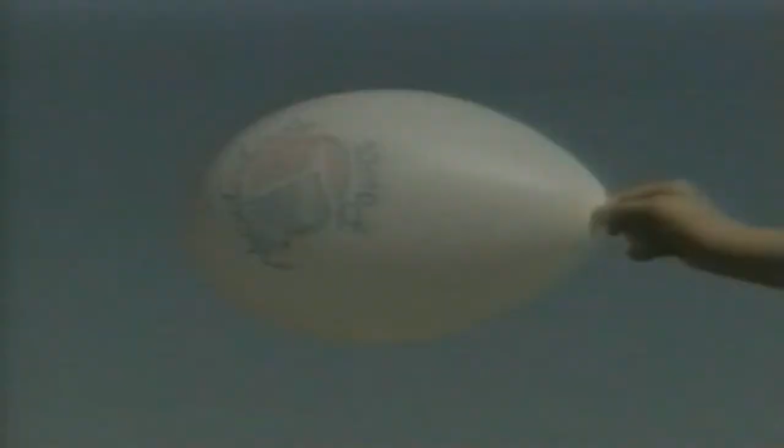A bullet is fired from a gun, and the gun kicks back. A jet engine works like that.

A stream of water is aimed at the heart of a fire, and the hose pushes back against the fireman. A jet engine works like that.

And remember as a kid how you blew up balloons and let them sail across the room? A jet engine works like that.

What do these seemingly unrelated things have to do with a jet engine? They're all related. They and the jet engine are all in the same family because each one reacts to an action of its own creation.

Isaac Newton spelled it out for us: to every action there is an equal and opposite reaction. The air rushing out of the balloon was the action. The balloon darting the other way was the reaction.

When the water surged from the fire hose, that was the action. All the while, the hose pushed back in the opposite direction. That was the reaction. When the bullet sped out of the gun, that was the action. At the same moment, the gun kicked back. That was the reaction.

A jet engine works on exactly the same principle. To every action, there is an equal and opposite reaction. A jet engine expels a continuous high-velocity stream of exhaust gases. That's the action. As a result, the engine thrusts forward. That's the reaction.

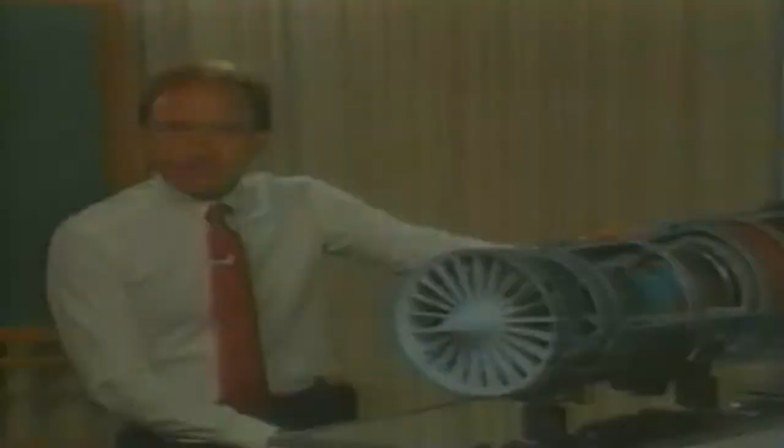Now, before we look at real engines and real parts, let's spend just a few minutes building a very simplified engine so we can see what the major engine sections are for. We'll call it our Simplex Mark I jet engine.

Picture the engine as being shaped like a big, long metal tube. This will form the outer case for our engine. Let's slice it right down the middle so we can look at the engine in cross-section.

A jet engine literally lives on air. It breathes huge volumes of air per minute. It draws air slowly in the front of the engine and jets it out the rear at a high velocity, thereby producing thrust. It does all of this by burning a combustible mixture of fuel and air.

So with that in mind, the first thing we'll install is the burner section. Metal lines bring fuel into the engine, and specially designed nozzles turn the stream of fuel into a fine spray, so it will mix thoroughly with the air.

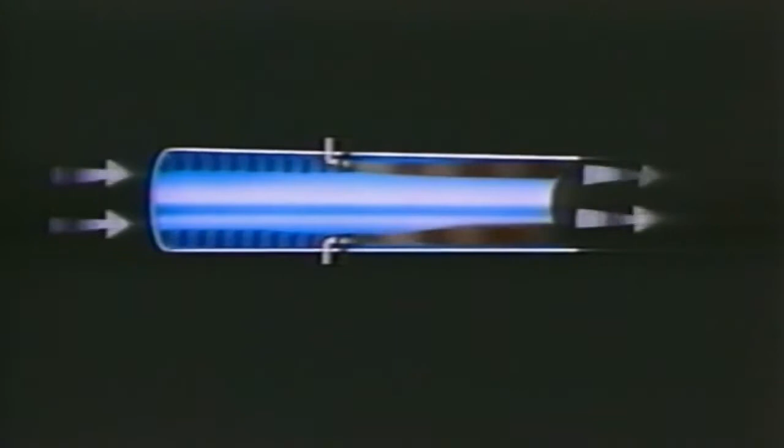Add igniter plugs, somewhat like the spark plugs in your car. When they spark, we have ignition, and then continuous combustion. Once ignited, combustion continues as long as fuel is supplied. The hot expanding gases escape out the rear of the engine.

Now we have the beginnings of what we need for our thrust equation to work. We have a mass, mostly air and a little fuel, and the burning process accelerates the mass. But that's just the beginning of the story.

Next, we need a compressor. We'll reshape the engine case to accommodate one that is made up of several stages. Each stage looks something like a glorified blade assembly from an electric fan, except that our compressor stage has many small, short blades mounted around the edge of a central disc. If we install it right here, we'll have the first stage for our compressor.

Now, put in a second, third, and fourth stage. Bolt them all together so they'll rotate as one unit, and we have a four-stage compressor.

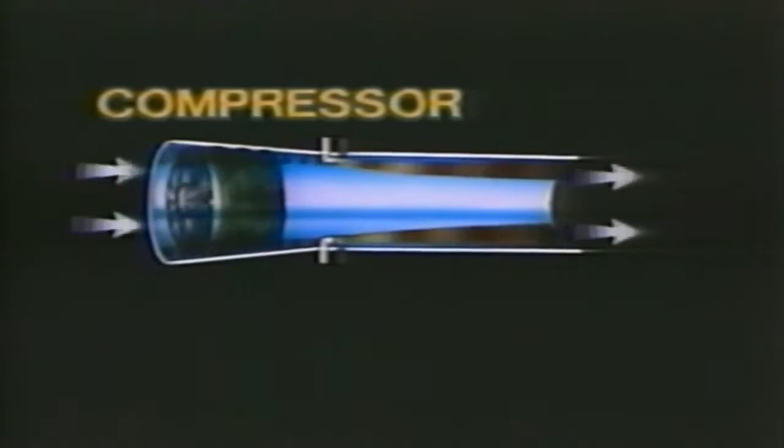Rotating at high speed, it draws air in from the front and compresses it. Stage by stage, it forces the air to flow into a progressively confined space until finally it delivers high-pressure air to the burner section. Why have a compressor?

To force huge quantities of air through the engine, to provide a big M in our equation. And as this high-pressure air rushes out of the compressor, it contributes to the A. And with air under high pressure, we can burn more fuel, release more heat energy to get more power, and do it efficiently.

Now, we need to find a way to turn the compressor, to rotate it at high RPM. We'll do that job with a turbine. Think of a turbine stage as having a disc and blades, much like the compressor. Only the materials are much tougher back in this very hot section of the engine, and the blades are shaped differently for the job they'll have to do.

We'll install a single-stage turbine right here behind the burner section. Then, we bolt in a shaft to connect the turbine directly to the compressor so they will rotate together at the same speed. The secret here is that the high-velocity gases from the burner flow past the turbine blades, causing the turbine to rotate like a high-speed windmill, thereby causing the compressor to rotate.

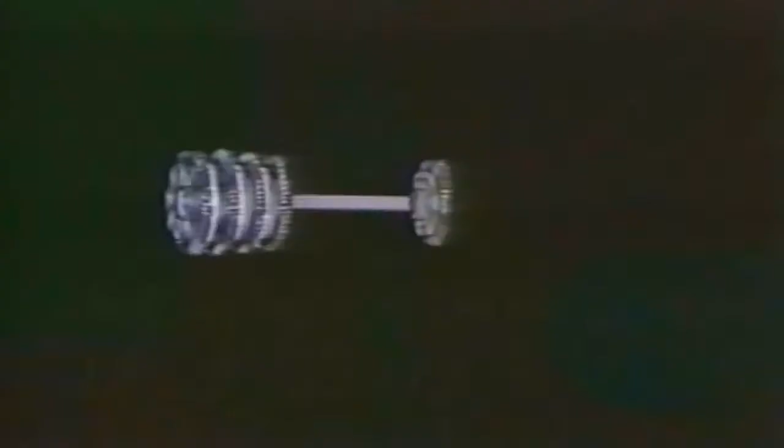By the way, if anyone tells you that a turbojet engine has only one main moving part, just say, sure, if you mean the combined compressor, turbine, and shaft. You're right.

Before we move on, we'd better install an inner case in the burner section to isolate the turbine shaft from the combustion area.

Next, we'll change the shape of the tube to form an exhaust duct that will provide a smaller opening, a nozzle at the very end.

Remember how the nozzle on your garden hose works? When adjusted right, it puts out a long, high-speed stream of water. That's how the exhaust duct works. Because of its shape, it speeds up, accelerates the hot gases just as they leave the engine.

That increases the A in our thrust equation to make our machine perform as a jet engine.

By now, I'm sure you realize that air doesn't flow through the center of this tubular-shaped power plant. Rather, it flows through the annular space in the compressor, burner, and turbine sections. From there, it all joins together in the exhaust duct. With that understanding, we can now add the final touches to our engine.

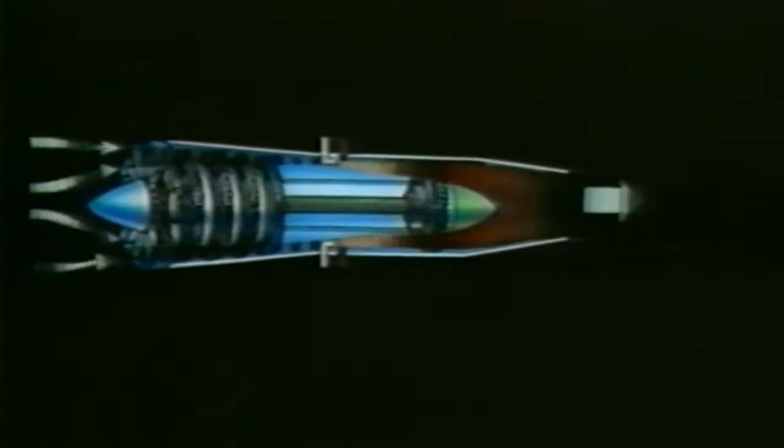Let's put an inlet section on the front. The stationary vanes and nose cone will streamline the flow of air as it enters the compressor. And we'll add a tail cone behind the turbine to smooth the flow of gases in this area too.

Now, our engine is in pretty good shape, but we have a design problem to consider. See all that flame passing across the turbine blades and into the exhaust duct? That won't do. It's inefficient and awfully hard on the parts.

We'll solve that by making two changes. Watch what we can do. First, we'll reshape the inner case in this burner section like this. Second, we'll reshape the outer case like this. Now we have created the diffuser section of the engine.

And look what it does to the path for flowing air and gases. Air leaving the compressor flows into an enlarged space, which slows the air down. This permits plenty of time for combustion to take place in the burner section where it ought to be.

Notice, too, the outlet of the burner section. The gases leaving the burner are squeezed back into a more confined space, speeding the gas back up again as it flows into the turbine.

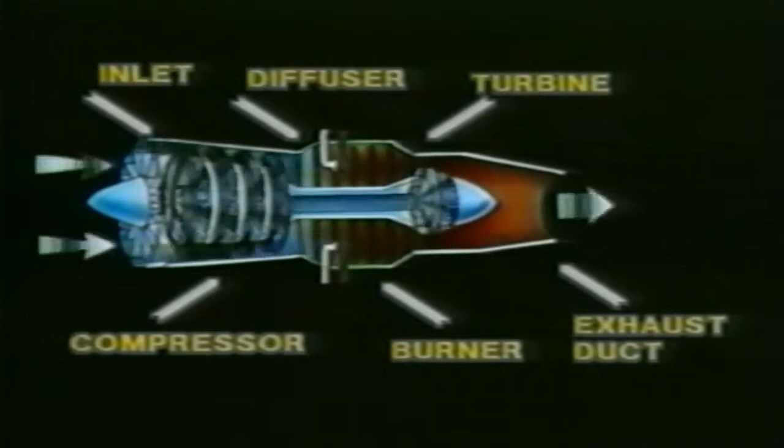Now our Simplex Mark I is complete and ready to go with all its major sections: inlet, compressor, diffuser, burner, turbine, and exhaust duct. An engine of this type is often called a turbojet, and you can see where it gets its name. Turbo. It utilizes a turbine, and jet. The exhaust duct jets the hot gases out through the nozzle at high velocity.

But then, many people call it a gas turbine engine, because it functions with a turbine that is driven by hot gases, rather than steam or water as in some other power systems.

Is a turbojet engine really this simple? Well, so far we've studied the major sections of the engine, but within those sections are more parts and features that need to be understood. So we'll go to something more realistic, a schematic of a typical turbojet engine.

Taking first things first, we'll start at the front and work our way through the engine until we get to the exhaust nozzle. So, how do we get the air to enter the engine smoothly and without turbulence? We do it with a well-designed inlet section.

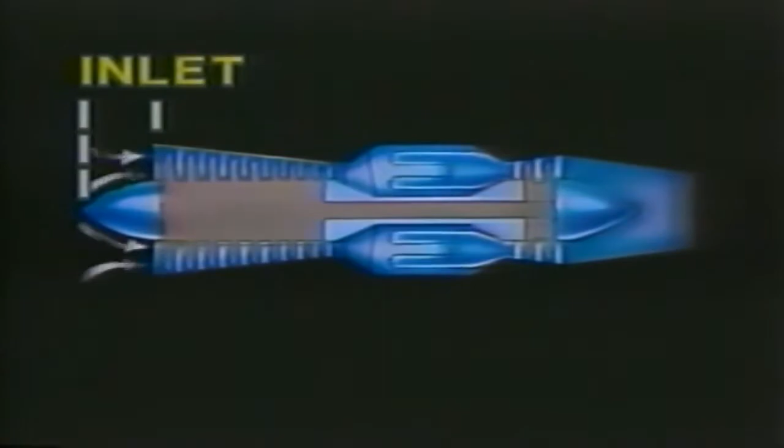It's a relatively simple stationary section. The outer case, inner case, and inlet guide vanes are the main structural parts. It has to be fairly rugged, though, because the bearing that supports the front of the compressor is mounted within the inner case. The nose cone also contributes to the smooth flow of incoming air.

Note that the inlet guide vanes have a cross-section that is airfoil-shaped. We'll find many airfoil-shaped parts throughout the engine. Some are shaped like the wing of a plane, others are just streamlined shapes. They're all designed to make the airflow react in some way. The inlet vanes have a slight twist to turn the incoming air at an angle so that it will enter the rotating compressor efficiently. Remember, the compressor is rotating at high RPM.

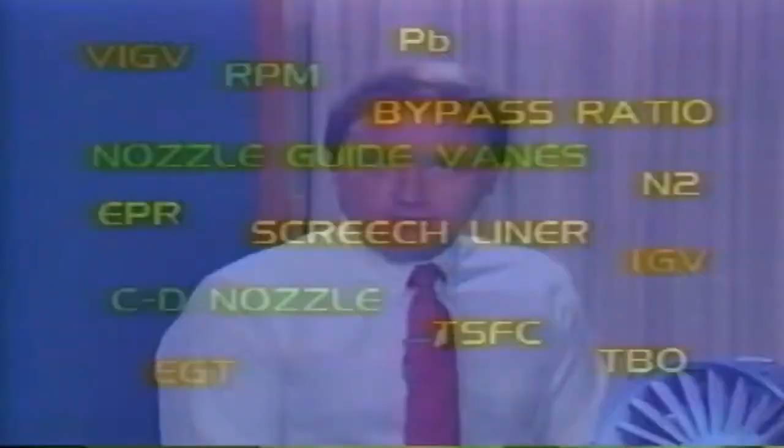We're beginning to see the jet engines have a language all their own: part names, operating terms, slang expressions, acronyms, abbreviations. I'll be careful to use the right language, and will point out significant terms as they come along. For example, RPM—we all know that means revolutions per minute. But IGV? The abbreviation for inlet guide vane.

Now, for the compressor and the big job it has to do: draw in huge volumes of air, compress it to 250, maybe 300 pounds per square inch or more, tolerate temperatures of 600 or 700 degrees Fahrenheit, withstand the centrifugal force created when it rotates at high RPM, and above all, handle the air smoothly, without turbulence, as it does all these things.

Our Simplex engine had only a 4-stage compressor rotating within a tubular case. A real compressor is a bit more complex than that. The compressor actually has two major components: the rotor, the rotating part, and the stator, the stationary part. When combined, they form the complete compressor assembly.

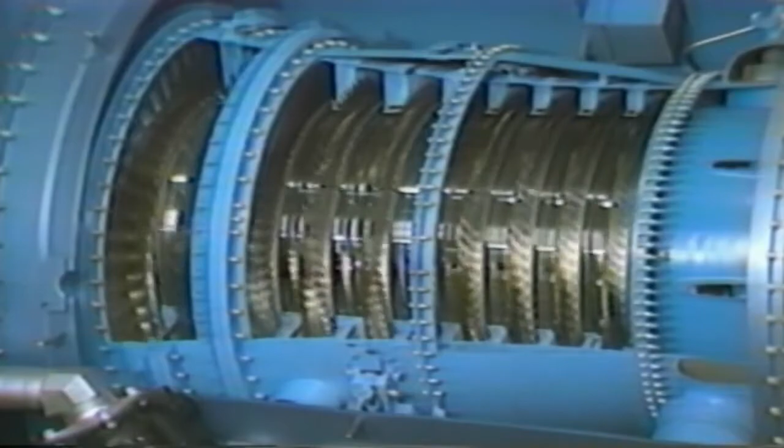Let's look at the makeup of the rotor first. It's shown here standing vertically with the front resting on the workbench. The rotor is made up of several stages, which are numbered from front to rear. With the rotor disassembled, the major parts are laid out for display.

You can see that each stage is comprised of a disc with many blades fastened around its outer rim. Notice that the discs are open at the center to reduce their weight. Flanges on a disc like this, projecting forward and rearward, provide proper spacing between the discs.

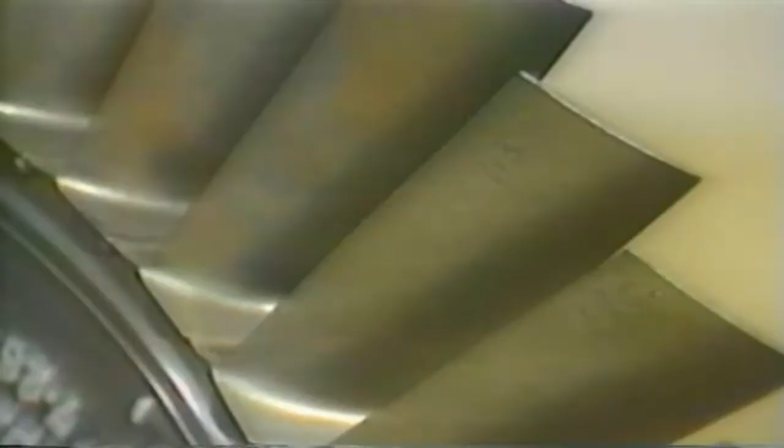The blades are retained in dovetail-shaped slots. They fit rather loosely when cold, but during operation, with temperature up to normal and centrifugal force tugging at them, they fit snugly in place. The number of blades, their size, and their shape varies from stage to stage because each stage has a slightly different job to do in the overall scheme of compressing the air.

See that wing-like shape I spoke of? Notice how thin the blades are, especially out toward the tip. One very obvious point: the longest blades are in the front, the shortest at the rear, because the air is being packed into a progressively smaller and smaller space. Look how short and small they are in the last stage. However, in some of the forward stages, the blades are so long that they require mid-span shrouds to provide blade-to-blade support. This prevents blade vibrational problems.

With the discs all bolted together, they form the complete rotor that rotates as one unit. Hubs at the front and rear are supported by bearings. As you can imagine, the compressor rotor must not be out of balance. Individual rotating parts, the discs and hubs, are first balanced. Then, each disc with its blades installed is balanced. And finally, after assembly, the complete rotor is carefully balanced.

Now back to the stator, the stationary element of the compressor. The stator is also built in stages. Each stage consists of an outer case, inner shroud, and many airfoil-shaped vanes. There's that word again. You can see the wing-like contour of the vanes where they are attached to the outer case. A stator stage fits behind or downstream of each rotor stage—for example, the first stage rotor and the first stage stator, and the fourth stage rotor and stator.

A stator stage has a twofold job to do. First, to receive the air from the rotor in front of it and redirect it at the proper angle into the rotor behind it. Second, to diffuse the air as it passes through these vanes, slow it down without losing any of the pressure being developed.

Because of the stators, we find that the air doesn't swirl round and round as it is compressed. In fact, it flows just about straight through. Which brings up another term we ought to remember: this is called an axial flow compressor because the air flows parallel to the axis of the compressor. For the same reason, we refer to this type of power plant as being an axial flow turbojet engine.

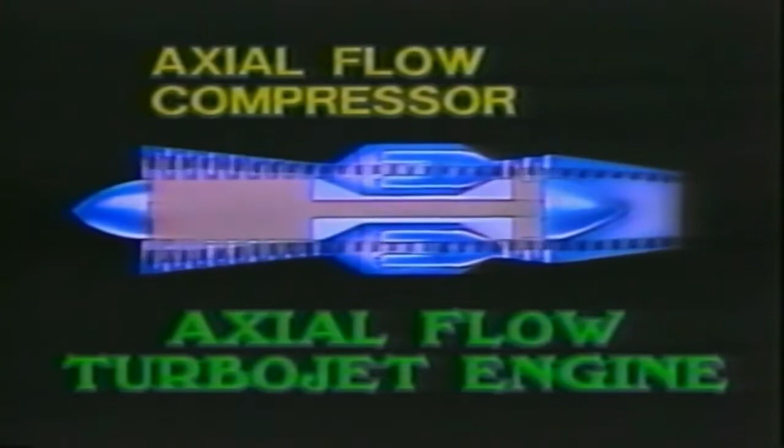To maintain this axial or straight-through airflow, it is important that the air doesn't circle back around the tips of the blades and vanes. There are two important features to prevent this. The rotor blades operate in very close proximity to the surrounding stator case, and the stator inner shroud forms an air seal with the spacer that fits between discs.

The last stage of stators, called the compressor exit vanes, directs the air straight back into the diffuser section. These vanes are often located in the diffuser case rather than in a separate stator case. The stator cases, when all joined together, form the stator assembly, which is the main strength, the backbone of the engine in this section.

Now, how much air pressure will the compressor develop? If it increases the pressure of the incoming air by 20 times, we say it has a pressure ratio of 20 to 1. With a ratio like that operating at sea level, it would boost the incoming air to almost 300 pounds per square inch. Compressors today have pressure ratios of 20 to 1 or better.

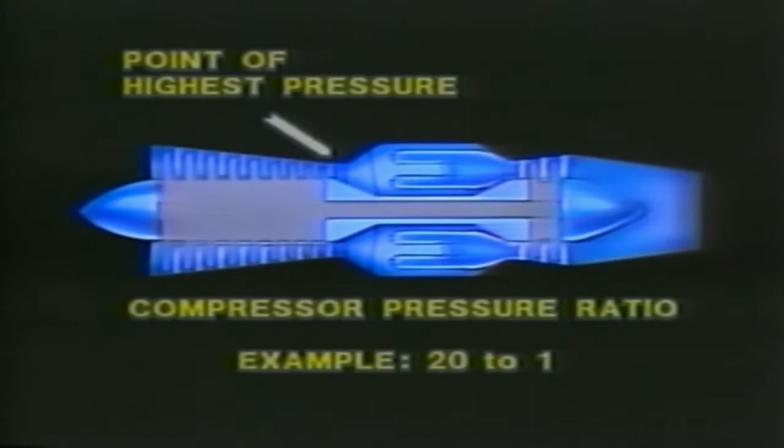Another point: the highest pressure within an engine of this type is always at the compressor exit. Okay, next up for discussion is the diffuser section.

It's made up of an outer case and inner case which are connected by several streamlined struts. It's very simple in its design, but it has important aerodynamic and structural roles to play. Compressor air flows through the annular space between the outer and inner cases. But notice the shape of this passage.

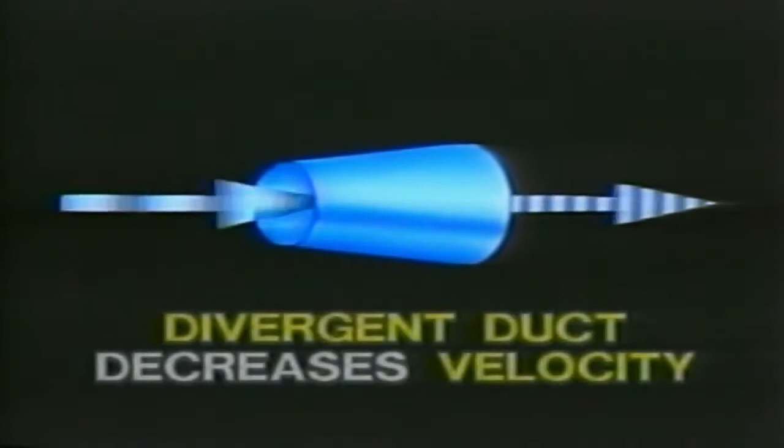This brings us to another law of nature that's put to use in jet engine design. When air flows through a convergent duct, cone-shaped like this, it increases the velocity of the flowing air, speeds it up. A divergent duct has just the opposite effect, slows it down.

The flow path in the diffuser is divergent. Air leaves the compressor at the correct pressure, but at a velocity that is too fast for complete burning in the combustion section. So the diffuser has the purpose of slowing the air down to an acceptable speed.

Structurally, the diffuser must be good and tough. The outer case forms a continuation of the complete engine case. The inner case houses the bearing that supports the rear of the compressor rotor. The diffuser struts, in addition to being structural members, straighten the airflow on its way to the burner section.

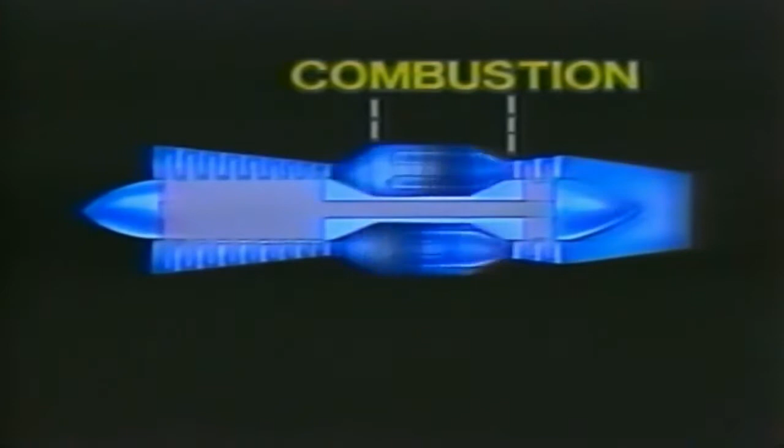The burner section has the more official designation of combustion section, so we'll label it just that. Remember, its job is to create rapidly expanding hot gases, all rushing toward the rear of the engine for two purposes: to turn the turbine and then jet out through the exhaust duct.

The main structural members are the outer case and the inner case. Again, the annular space between is where the action takes place. However, we don't just burn fuel in that open space like we did in our Simplex Mark I. We need a way to regulate the burning process to provide truly efficient combustion.

We do this by burning the mixture of fuel and air within several individual burner cans. They're placed side by side to form a circle of burner cans within that annular space. The number of burner cans varies for different engines. We'll say that our typical engine has 8.

A cluster of fuel nozzles supplied by a fuel manifold introduces fuel into the front of each burner can in a spray pattern for rapid and thorough mixing with the air. Combustion is complete and the flame is confined within these burner cans. But even with the use of special metal alloys, the cans have to be specially designed to prevent the metal from being destroyed.

The air, which is essential for burning, flows from the diffuser into the annular space and then enters each burner can through a myriad of holes. The holes vary in size, shape, and spacing, so that the actual flame is centered in the middle of the can by the incoming air and does not touch the metal walls of the can. The temperature of that flame, by the way, is 3,500 degrees Fahrenheit or hotter.

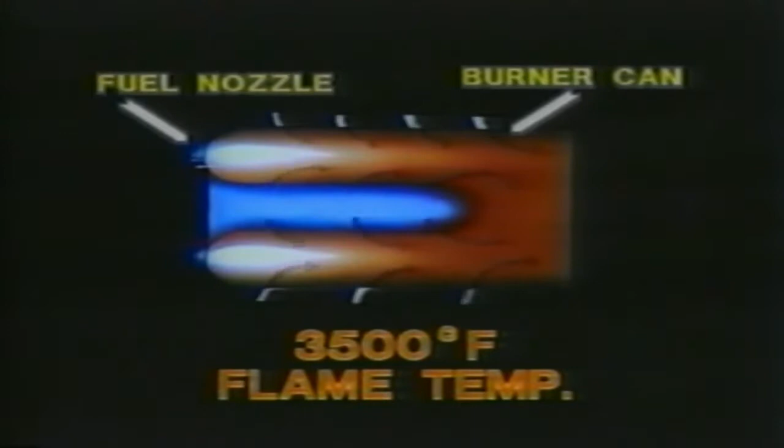About 1/4 of the air is directed into the flame area for combustion. The other 3/4 is directed along the wall of the burner can to provide a blanket of cooling air. Burned and unburned air mix together at the burner can exit, substantially reducing the temperature.

Ignition to start the burning is provided by igniter plugs in 2 of the burner cans. The burner cans are interconnected by small flame tubes, so that during the starting process, flame started in 2 of the cans develops rapidly in all the others. Once started, burning is continuous during engine operation, and it's not necessary for the igniters to continue firing.

The burner cans are supported at the front by brackets attached to the 8 diffuser struts. They are supported at the rear by an outlet duct that provides a transition from 8 circular openings at the front to a single annular opening at the rear. Notice that the outlet duct forms a convergent flow path. This causes the rush of exhaust gases to accelerate even more as they flow into the turbine section.

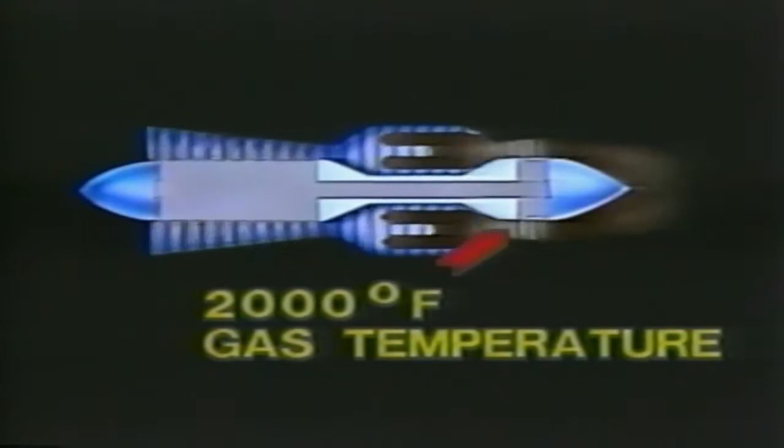And now we've arrived at the hottest section in the whole engine. The total output of the burner impacts directly on the turbine. Temperatures here may well exceed 2,000 degrees. If the best in metallurgy was ever needed, this is the place. So let's look closely at the makeup of the turbine section.

The burner case and now the turbine case continue to form the outer shell strength in these areas. And by the way, you can always recognize a turbine case because of its unique shape. See how it overlaps the burner section? That wasp waist shape provides the convergence we need at the burner exit, and the enlarged diameter at the rear accommodates the size of the turbine rotors.

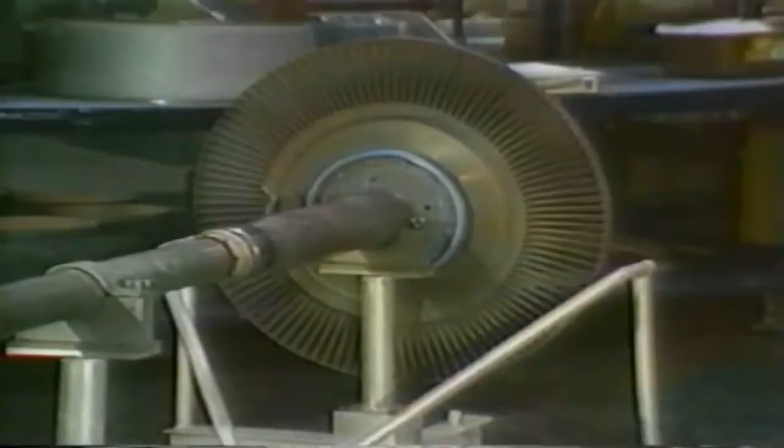Now, we've said it before, the turbine has a single-minded purpose: to rotate the compressor so it can do its job. And like the compressor, it also has a rotating and stationary element. The turbine rotor spins like a glorified windmill as the exhaust gases flow past. Fact is, it extracts about 3/4 of the hot gas energy just to drive the compressor. Being joined to the compressor by the long turbine shaft, the turbine and compressor both spin at the same high RPM. An engine like this will run at about 10,000 RPM or higher.

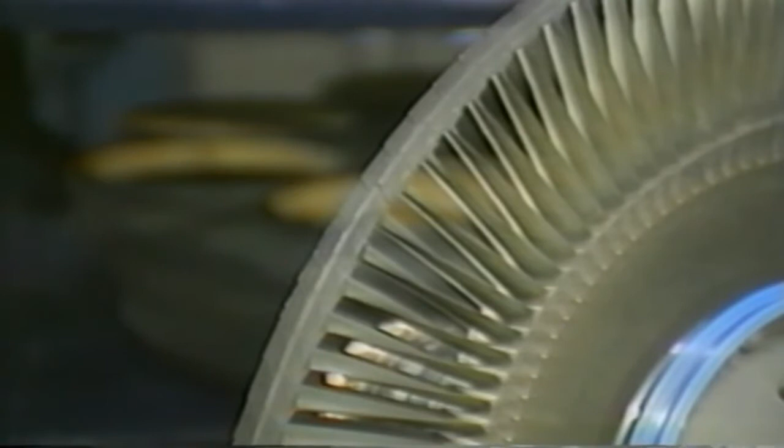Each rotor stage, or turbine wheel, as they are sometimes called, is made up of a disc and blades, much like we found in the compressor. The unusual shape of the blades, especially the great curvature, is designed to convert the energy of the gas flow into rotational power. You will find that the longer turbine blades frequently have tip shrouds to prevent blade vibration problems, and also to reduce gas flow leakage around the tips of the blades. Some turbine blades, because of the tougher and therefore heavier materials required, are retained in the disc using a fir tree base rather than the dovetail shape we spoke of before.

Now, how about the stationary element of the turbine? Each stage consists of many vanes attached to the turbine case. These nozzle guide vanes, as they are called, precede each rotor stage. Nozzle guide vanes? Good name for them. They guide the hot gases at the most forceful angle against the rotor blades. And since the openings between the vanes form a series of small convergent nozzles, they speed the gas up as it flows against the rotor.

You'll hear people speak of a complete assembly of these vanes as being a turbine nozzle. Our engine, then, has a first stage turbine nozzle and a second stage turbine nozzle. Are you beginning to see that while the turbine looks similar in some respects to the compressor, it is really quite different?

The compressor is forcing the air pressure to rise by packing it into a smaller and smaller space. The compressor can only do this in small, easy steps. Our typical engine has 9 stages.

The turbine, however, is permitting the hot gases to escape, exchanging this source of energy for rotational power. Turbines can do this in large steps. Ours has 2 stages. Turbine materials are different too.

They must be tougher and highly heat resistant. In many of our engines, the forward stages of the turbine have air-cooled blades and vanes so they can tolerate these extreme temperatures. Relatively cool air is routed from the compressor through special passages and then right through these hollow blades and vanes. The escaping air then joins into the main stream of exhaust gas.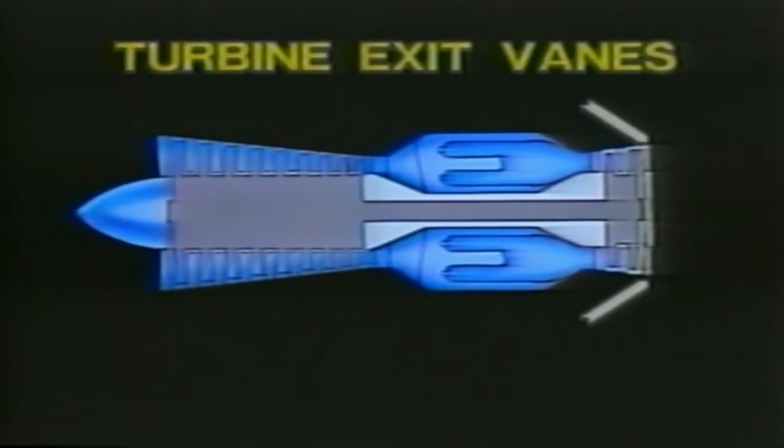2 more points and our turbine is complete. Turbine exit vanes straighten the airflow as it passes into the exhaust duct and provide the structure to support the turbine rear hub bearing. And just as in the compressor, you'll find the need here to prevent flow leakage around the tips of the blades and vanes. Special air seals and minimum blade tip clearances are part of the turbine scheme too.

Let's take a final look at the turbine by reviewing the stage numbering. First stage nozzle, first stage rotor, second stage nozzle, second stage rotor, and exit vanes.

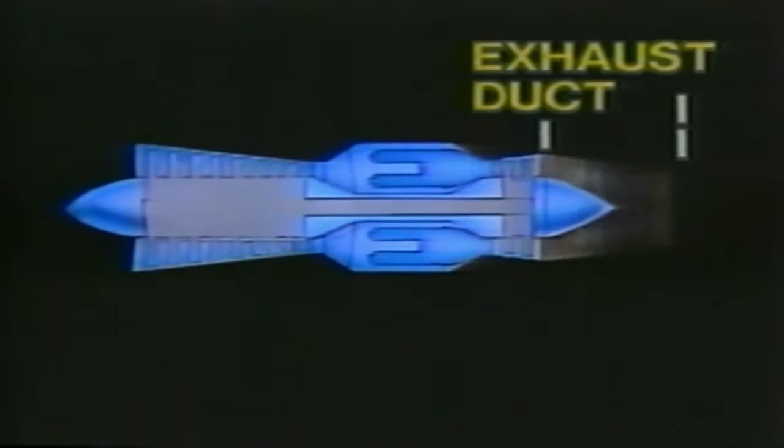Last comes the simplest part of the engine, the exhaust duct. Because of its convergent shape, it accelerates the gases to the highest possible velocity just as they leave the engine. Because of this jet effect, the final opening in the duct is called the exhaust nozzle. The nozzle is sized and measured carefully in square feet of opening to provide the exact gas velocity required to produce a specified thrust.

A tail cone streamlines the inner boundary of the gas flow. And now, our engine is complete.

We've covered a lot of ground in short time. So let's summarize by reviewing some of the highlights. The tubular outer cases of the engine, when all joined together at their bolted flanges, form the main strength of the engine. The one main rotating part in the engine is the combined compressor, shaft, and turbine, all rotating at the same RPM.

This huge mass of rotating machinery is supported by bearings in the inlet case, diffuser case, and turbine case.

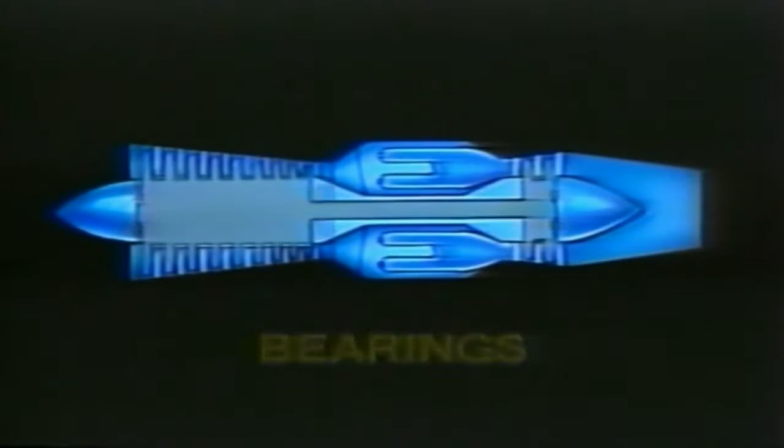Air at atmospheric temperature and pressure enters the inlet at a relatively low velocity. The inlet section ensures a smooth entry of air into the first stage of the compressor. The compressor draws in a huge mass of air and compresses it to a high pressure. The diffuser slows the air down while retaining the high pressure.

The burner increases the velocity of the air by adding the energy of burning fuel. The turbine extracts energy from the hot gases as they rush by and converts it into rotational power to turn the compressor. The exhaust duct and nozzle boost the gases to a final high velocity.

So you see, air and gas don't flow through the center of the engine. Rather, they flow through the annular space in the various engine sections.

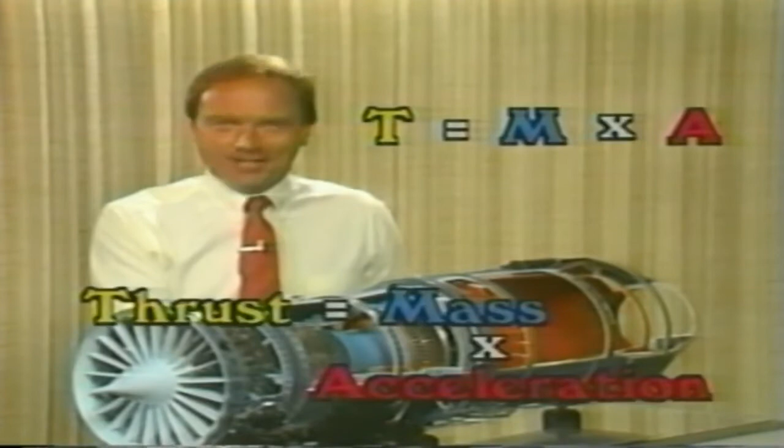Now let's take a final look at our thrust equation. Did it work? You bet it did. The compressor assured us of a huge mass of air, and the total engine created a final high velocity at the exhaust nozzle that gave us the acceleration we needed. We'll have to leave it up to our design engineers to pick it up from there, to account for the fuel passing through the engine and other important factors needed to arrive at a real and accurate thrust value.

The engine we've been studying is typical, but there are some variations in the design of turbojet engines you can watch for. Here are 5 common ones you should know about.

First, to build more efficient engines, we need higher compression ratios. Often, this requires more stages in the compressor. Suppose we change our 9-stage compressor to 16 stages and add the necessary turbine stages to power it.

That looks good, but the problem is all 16 stages are rotating at the same RPM, and that would result in inefficiency. The big long blades up front are trying to grab a lot of air and pull it in. The smaller, shorter blades toward the rear are working under pressure and trying to create even more pressure. This results in poor engine performance and would likely result in an operating problem called compressor stall.

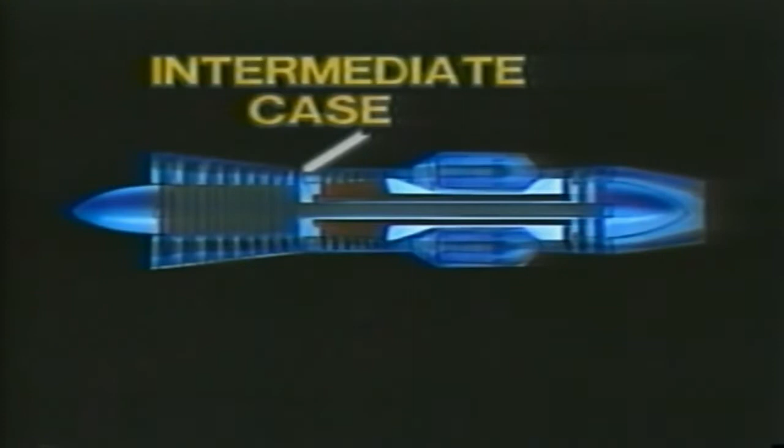However, this has one additional major part: the intermediate case, a rugged structure that joins the two compressors and provides bearing support for both. The struts straighten the airflow as it passes through. Obviously, the bearing system must be more elaborate in an engine like this. The one shown here has 8 bearings.

Before we move on, let's resolve a point of terminology on this dual rotor engine. Here's a situation where people in the jet engine industry have three names for the same thing. The low-pressure compressor is also called the low compressor or front compressor. No confusion, the terms make sense. The high-pressure compressor is also called the high compressor or rear compressor. The same trend in language also follows for the turbine. And you'll find the dual rotor concept itself called by other names: twin spool, dual axial. Take your pick, they all mean the same thing.

Since most of our engines today have a dual rotor, we'll use this type in illustrations coming up.

Let's digress for a moment and talk about compressor stall. What is it? It's a momentary condition, most often where airflow over the compressor blades becomes turbulent. The blades actually stall, just as the wing of an airplane might if it approaches the air at too great an angle. Air no longer flows back through the compressor as it should. In fact, the air does a complete turnaround. While the condition exists, the normally higher pressure at the rear of the compressor causes the air to actually flow forward. It can happen to one blade or many, to one stage or several stages, to one compressor or both.

The result of compressor stall is engine surge. Airflow through the entire engine is momentarily disrupted. Vibration is likely. Metal temperatures climb for lack of air cooling. Combustion is irregular, and loud bangs may be heard. Flameouts can occur.

Sound mysterious, like a demon that intrudes in the night? Not really. Compressor stall is an inherent potential problem in all high-performance jet engines. Compare it with the piston engine in your car. It has an inherent but different problem. With the wrong grade of gas, it will ping. Maybe you call it knock or detonation. The point is, all gasoline-powered four-cycle engines are prone to do this.

With the high airflows and high pressures demanded of a modern-day compressor, compressor stall is an ever-present characteristic that our designers must deal with head-on. It can be caused by conditions that drastically disturb the smooth flow of air through the compressor: unusual aircraft attitude, flying in turbulent air, ice buildup in the inlet, jam acceleration, things like that.

What do we do about it? How do we build high-performance compressors and yet avoid this condition? We do a number of things. The dual-rotor compressor, we've already discussed that, decreases the engine's susceptibility to stall a great deal.

Compressor air bleeds provide another answer. Most all of our engines have these. Air bleed ports release part of the compressed air overboard during those periods of operation where stall is most likely to occur. This relieves the bottleneck to airflow that can cause the stall. The bleed ports and their controlling valves are usually located between the low and high compressors. They are open while starting the engine to let it gain RPM more easily, and they're closed during high thrust operation. During other periods of performance, acceleration, deceleration, low thrust levels, and so forth, the bleed valves are scheduled to open or close automatically, depending on operating conditions.

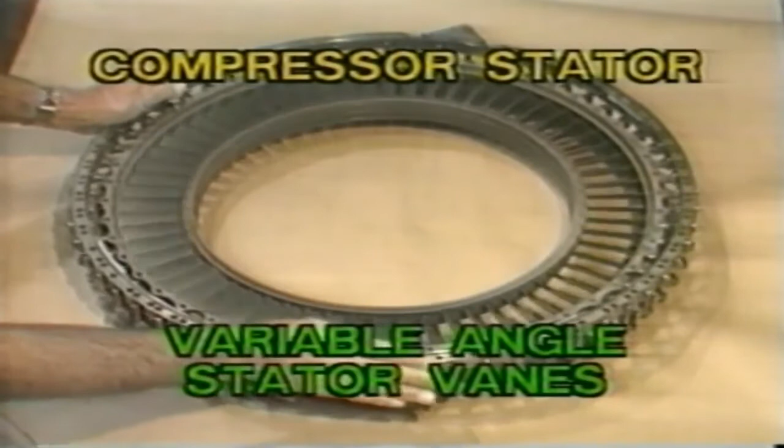Up to now, we've seen stator vanes that are manufactured at a fixed angle. Variable angle stator vanes are stator stages in which the vanes can be angled a little more, a little less, to tailor the airflow and pressure to avoid stall situations. A sync ring controlled by hydraulic actuators synchronizes the movement of the vanes.

They're used in the forward stages of a compressor, and it's common to find a similar arrangement used for the engine inlet, where they are called variable inlet guide vanes, VIGV for short. For example, on our typical engine, we find them used at the inlet, the first two stages of the low compressor, and the first two stages of the high compressor.

These variable stators are frequently used in conjunction with an air bleed system to prevent compressor stall. And like the air bleeds, they are scheduled to function automatically as engine conditions signal the need. So three of these variations in design, the dual rotor, overboard air bleeds, and variable angle stator vanes, have to do with that all-important smooth, steady flow of air through the compressor.

Another major difference in our family of engines is in the combustion section. As you'll recall, our typical engine had multiple burner cans, 8 of them, where the burning actually took place. Our more recently designed engines have an annular burner, one continuous circular burner. You can recognize many of the design features used in the multiple can setup: the brackets for attachment to the diffuser case, the fuel nozzles, evenly spaced around the forward edge.

The holes for combustion air and cooling air are used in the same way. With the annular burner, you look for them on the outer surface and inner surface. But notice that the design eliminates the need for the separate, rather complex outlet duct required for the 8 burner cans.

Advantages compared to the multiple can setup? Smaller, lighter. It provides more efficient combustion, and yet it takes up less space. In some of our later engines, the annular burner requires so little room that the diffuser and burner cases are combined as one.

Now, the last of these design variations we want to cover provides us with an entirely different type of compressor. Rather than the multiple stage axial flow type that we've illustrated so far, this is a single stage centrifugal flow compressor. The impeller rotates at high RPM within a closely fitting case. The incoming air, trapped between the vanes of the impeller, is pressurized as it is slung outwards and packed into the confined space at the rim. From there, it flows through the diffuser and into the burner.

Jet engines seldom use centrifugal compressors alone. Usually they are used in combination with the axial flow compressor. In this engine, for example, air is first compressed by a 3-stage axial flow compressor and then compressed further by a single-stage centrifugal compressor.

As you have just seen, jet engines do vary in design, and that's mainly because of the customer's requirements and the mission an aircraft is destined to fly. You see, the design of each engine is tailored to meet the demands of a specific type of plane.

Now that we understand the principles used in our typical jet engine, we're ready to see how this thing we call a gas turbine engine can be applied in different ways. You see, the combined sections of the engine that really generate the power, the compressor, diffuser, burner, and turbine, are called the gas generator. The gas generator not only functions on its own, but it generates hot exhaust gases, energy in the form of heat and pressure that can be used in a variety of ways.

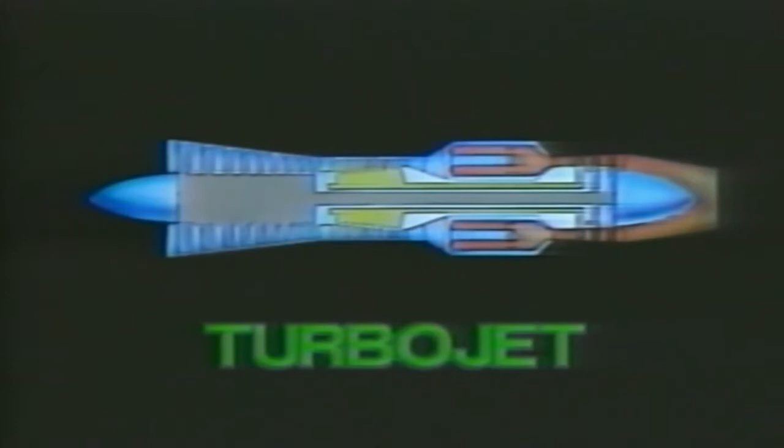We've already seen that the addition of a convergent exhaust duct turns it into a turbojet engine. Let's take the gas generator now and add the necessary parts to build an afterburning turbojet engine. The afterburner is, in effect, one huge burner can where we burn more fuel to accelerate the gases to an even higher rate, to make the A in our thrust equation much larger.

Fighter and interceptor aircraft require that their engines produce more than their normal power for short periods of time: takeoff, climb, maybe a burst of speed for combat. Well, the afterburner serves this need. It provides thrust increases of 50% or more. The amount varies with different engine models. However, they're used only for short periods of time because they double or triple the engine's fuel consumption while they're in operation. The afterburner, called AB for short, is a large addition to the engine, but it's not complicated.

First off, it requires a diffuser case. In combination with the tail cone, it provides a divergent flow path to slow the exhaust gases down a bit prior to combustion. Just as in the gas generator, the flow of gases into the afterburner has to be slowed to the extent that complete burning can take place within the afterburner.

The afterburner duct, or main case within which all combustion takes place. Notice the diameter and length of this thing—it's the largest single component in the engine. On engines like this, you'll find a variable area exhaust nozzle, one that can be scheduled to automatically vary its opening, larger or smaller, to help create the amount of thrust the pilot calls for.

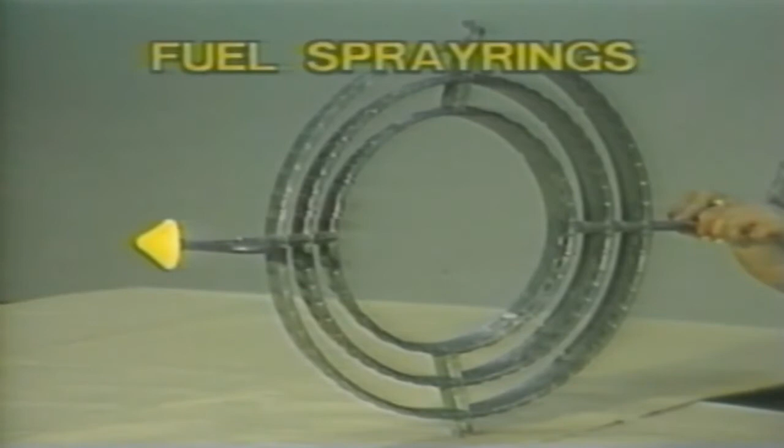Circular fuel spray rings, several of them, each with built-in fuel nozzles. They're scheduled so that with one or two rings providing fuel, the pilot can get partial power from the afterburner. With all the rings supplying fuel, maximum power from the AB is obtained, and of course with this condition, the total engine is producing its maximum power.

The flame holder sits right in the path of the gases as they enter the combustion area. Its purpose is to create turbulent gas flow. Maybe that's why it's the ugliest part of the entire engine—after looking at so many smoothly contoured and airfoil-shaped parts, this is truly a strange-looking sight. It's a network of annular and radial gutter-shaped pieces that slow the gases down even more and provide thorough mixing of the fuel and air, so the flame will be held within the afterburner and not be blowing out the exhaust nozzle.

The igniter plug is frequently mounted right in the flame holder. As in the gas generator, the high-intensity spark is required just long enough to get the fuel and air mixture lit. After that, the flame is continuous and self-sustaining.

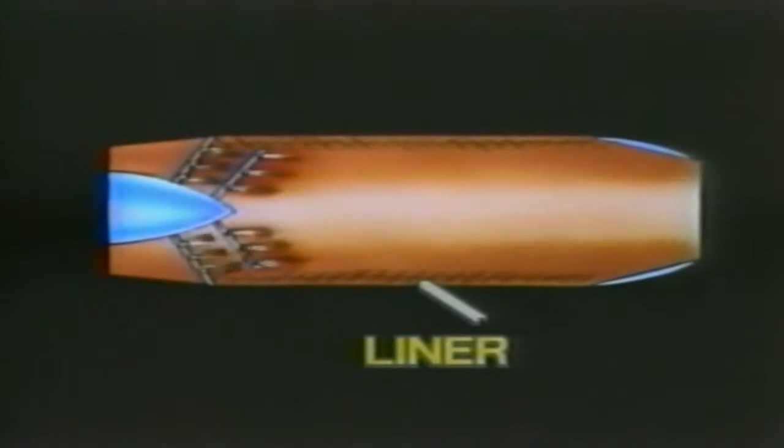The liner has a rough and tumble job to do. In fact, it serves a dual purpose. A portion of the exhaust gases, cooled considerably by the time they leave the turbine, flows between the duct and liner and then passes through thousands of tiny holes in the liner into the combustion area. This confines burning to the center and helps keep the AB duct cool enough to survive the extremely high temperatures.

Its second purpose is to reduce noise. The AB makes a howling or screeching sound. In fact, this part is often referred to as the screech liner because it is designed to do an acoustical job by reducing the amount of noise the afterburner creates.

And there you have it. The afterburner serves the military pilot well. When he positions his throttle between idle and intermediate, the gas generator alone delivers the thrust he needs. The afterburner merely acts as a long exhaust duct, with the exhaust nozzle serving its usual function. When the pilot wants more thrust, from intermediate up to max power, the gas generator continues to deliver its utmost, and the AB cuts in and contributes to the total thrust produced. Fuel flow from the spray rings and the exhaust nozzle opening vary according to the amount of thrust called for.

Okay, let's look at a second way of applying the gas generator for propulsive force. Suppose you managed an airline and your air routes were all milk runs, up and down, out of small fields all the time. You need engines that will provide quick takeoff and rapid climb out. What's the best engine for that? A turboprop—a gas turbine engine that turns a huge propeller.

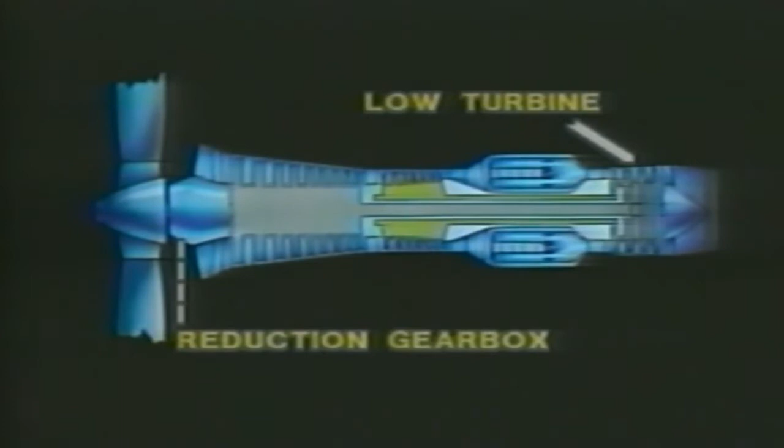Notice that the prop is driven by the low-pressure turbine, but not directly. The low turbine drives the low compressor. The low compressor drives a reduction gearbox, and the gearbox rotates the prop. A gear reduction of about 10 to 1 is typical. With that, the engine might be turning at 10,000 RPM and the prop would turn at 1,000 RPM.

You see, props can't be turned at real high RPM. If they did, those long blades would exceed the speed of sound, above which conventional propellers operate inefficiently and are subject to stress beyond their limitations. And notice, too, that the low-pressure turbine in this engine must be relatively larger or have more stages because it has more work to do. It has to extract enough of the hot gas energy to rotate the low compressor and the prop.

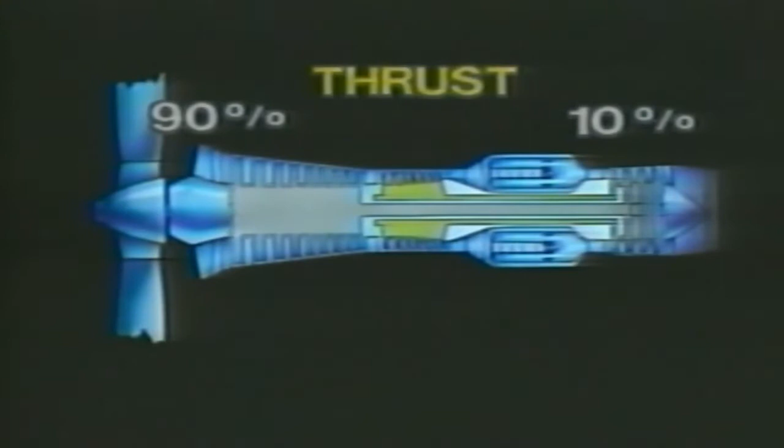A turboprop gets about 90% of its propulsive power from the prop and 10% from the jet effect of the exhaust nozzle. And by the way, a propeller produces thrust using that very same thrust equation—only this time, the prop is handling a huge mass of air, but imparting a relatively small acceleration.

That's why when comparing it to a turbojet engine, it has spectacular acceleration and takeoff characteristics and proves to be more efficient at aircraft speeds of 400 miles per hour or less. However, it doesn't do well at higher altitudes where air is too thin for the prop to perform at its best.

What we've just said about thrust is true, but you won't find turboprops rated in pounds of thrust like the turbojet engine, because most of its power is extracted from the shaft rather than the jet exhaust. It is rated in shaft horsepower, SHP, or sometimes equivalent shaft horsepower, ESHP, which is the power from the shaft plus the equivalent horsepower gained from the small jet effect of the exhaust.

Let's consider a type of engine that performs right alongside the turbojet in terms of high aircraft speeds and high altitude performance, and yet provides a rapid takeoff and climb that the turboprop is known for. This is the turbofan engine.

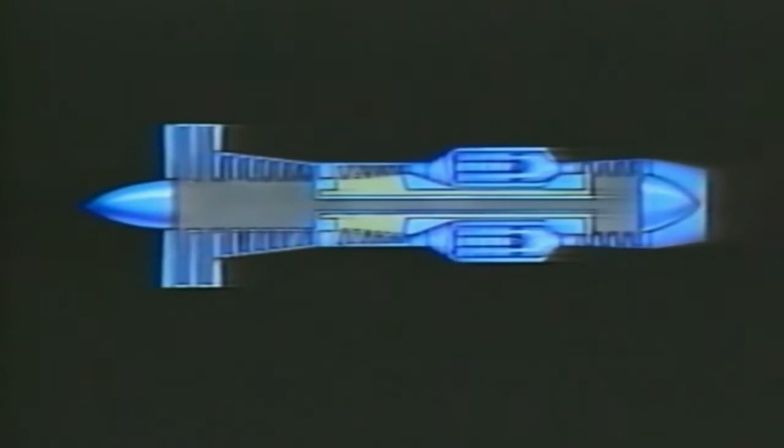Take a closer look. The forward stages of the low compressor have extra long blades and vanes, and they serve two distinct purposes. The inner portion of the blades and vanes function as part of the low compressor in the gas generator. The outer part serves as a multitude of miniature propeller blades, properly called fan blades. They draw in an additional mass of air, accelerate it, and then expel it from the exit of the fan section, thereby producing a separate additional source of thrust.

It takes a lot of power to rotate this low compressor with the added fan blades, so the low pressure turbine must be large enough, have enough stages to do the job.

So the gas generator with its jet nozzle contributes to the overall thrust, and the fan contributes too. How much? For a ballpark figure, let's say 50-50. But it's hard to generalize because the amount of thrust generated by the fan depends on its size and the number of stages. Some engines have single-stage fans. Our schematic shows two. Others have more.

And this brings us to the term bypass ratio, the ratio of fan air to gas generator air. Our PW 2037 commercial engine has a bypass ratio of about 6-to-1 because its fan handles a great share of the air. If our schematic appears to show that the fan and gas generator handle equal amounts of air, then our engine has a bypass ratio of 1-to-1.

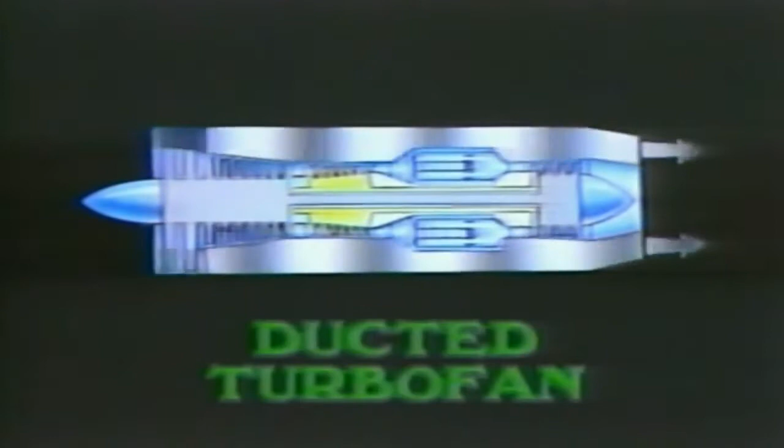The fan exhaust is handled in different ways, depending mainly on the needs of the aircraft installation. On some, the short fan case shown is all that is needed. And on others, a long fan duct encircling the whole engine carries the fan air back to where it joins with the gas generator exhaust. In this configuration, the engine is referred to as a ducted turbofan. Our commercial JT8D is built like this.

Now, if we develop this engine one step further, we'll have today's typical military engine, the augmented turbofan. The augmenter is nothing new to us. Yesterday's afterburner is today's augmenter, the same thing, they just changed names on us. The terms are interesting though. Afterburner describes what it does. Augmenter tells us why we have it.

From our discussion on the afterburner, I'm sure you'll recognize the fuel spray rings, the flame holder, the liner, and so forth. Look how the concept is applied to our fan engine.

When running at throttle settings up to intermediate, the exhaust gases and fan air join together downstream of the turbines and exit through the exhaust nozzle. The engine performs as a ducted turbofan.

Above the intermediate power setting, the augmenter cuts in and provides infinite variation in power up to maximum. The big difference between this engine and the afterburning turbojet is that the turbofan gets its oxygen for burning from two sources: the unburned air in the gas generator exhaust gases and the supply of fan discharge air.

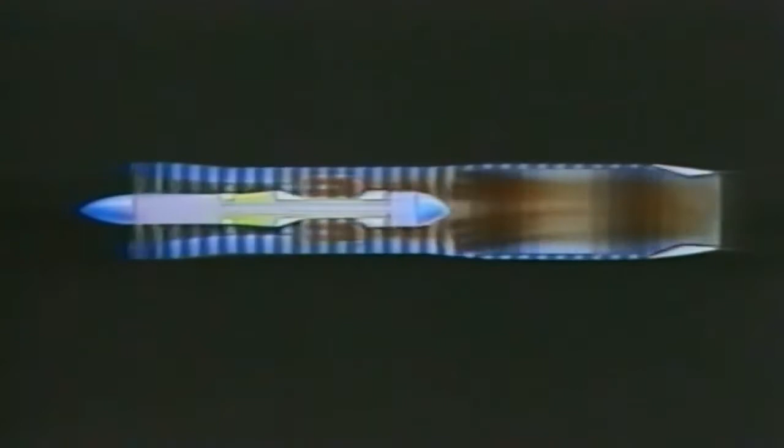The exhaust nozzle is shaped differently than on our previous illustrations. Remember, we discussed how convergent and divergent shapes influence airflow. The convergent areas accelerate flow, and the divergent decelerate flow.

That's true with air or gas flowing subsonically, below the speed of sound. Flow through the gas generator is subsonic, and we've seen how these principles are applied. But it may sound strange, this principle reverses itself when air or gas flows above the speed of sound. A convergent duct slows the air down, and a divergent duct speeds it up.

Now we can see how our designers put this knowledge to work using the CD nozzle, the convergent-divergent nozzle. Velocities are below the speed of sound, Mach 1, until they reach the exhaust nozzle. To gain the greatest possible acceleration through the nozzle, the convergent section brings the gases up to Mach 1, and then the divergent portion accelerates the gases even more, above Mach 1.

The same understanding of airflow is used in designing the aircraft inlet, that part of the airframe that guides air into the engine. With the aircraft flying at Mach 2, two times the speed of sound, you may wonder why air doesn't ram itself through the engine at Mach 2. If it did, it would be destructive. The engine wouldn't tolerate that.

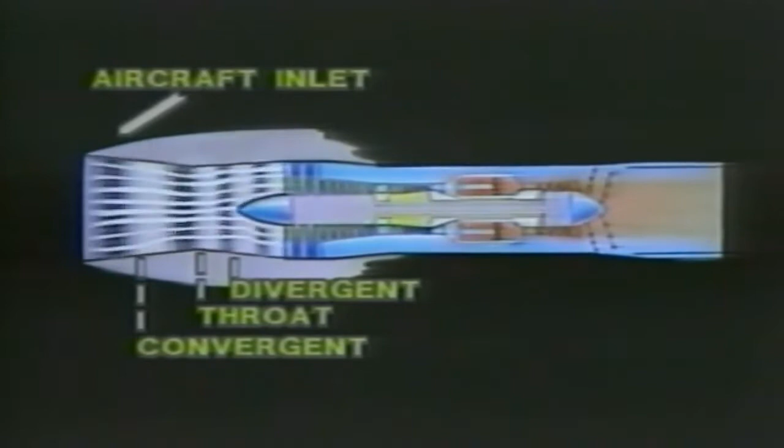So a CD inlet is used, in this case, to slow the air down. The convergent section slows the air from Mach 2 down to Mach 1 at the throat, and the divergent section slows it even more before it enters the engine. Just as the exhaust nozzle is scheduled to vary the size of its opening for varying amounts of thrust, the aircraft inlet is often designed to vary its configuration to accommodate different inlet velocities.

Okay, one more family member you should know about. This application of the gas generator is a blood relative of the engines we've seen so far, but it doesn't have to fly to earn its keep. This is the turboshaft or free turbine engine, the one used for a variety of power requirements.

This time, we mount a free turbine just downstream of the gas generator turbine. By free, I mean it's free to rotate independently of the gas generator. Picture it as if it were a windmill, free to spin in the blast of hot gases. The output shaft, connected directly to the free turbine, makes the rotational power readily available for work to be done. The exhaust gas, its energy pretty well spent in driving the free turbine, is directed out and away from the installation to any convenient location.

These engines are rated in shaft horsepower, like the turboprop. Can you imagine 40 to 50,000 horsepower available in one package? They can be used as a power source for a variety of applications: turning huge electrical generators, rotating natural gas pumps. And by the way, our engine designs can be adapted to run on a variety of fuels, including natural gas.

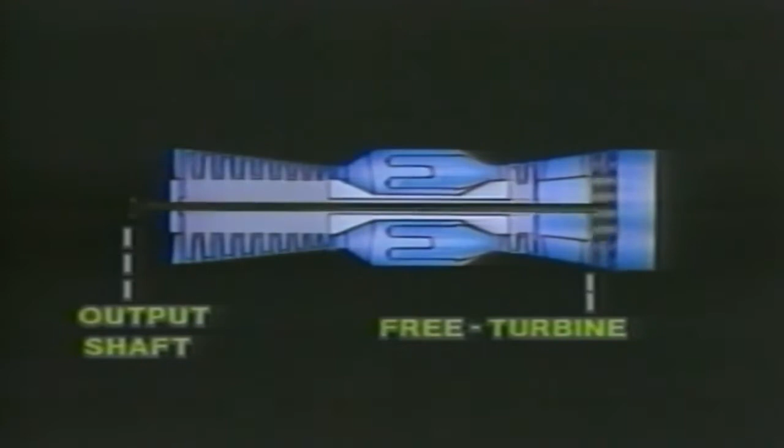Turboshaft engine design varies. The output shaft doesn't necessarily have to project out from the exhaust end of the engine. In this version, the free turbine shaft revolves within the gas generator shaft so that the rotational power of the free turbine is available at the front of the engine, as it might be for a turboprop application.

Well, you can see now that the gas generator is a very versatile power source. It is the heart of every engine we build, whether it be turbojet, turboprop, turbofan, or turboshaft.

Up until now, we've been dealing with bare bones engines, just plain engines with no way to run them or control them. Maybe you've seen all the plumbing, wiring, valves, and so forth on the outside of the engine. Now, we'll find out what they're for.

For a comparison to what we'll be talking about, look under the hood of your car. You'll find a carburetor, alternator, power steering pump, air conditioning compressor, etc. Well, the jet engine needs its accessories too, some similar to your car and others a good bit different.

Let's find them. A gearbox mounted below the engine provides the rotational power for most of the accessories that must be driven. The gearbox gets its rotary power from the compressor. As the compressor rotates, a pair of bevel gears and tower shaft transfer the motion down to the gearbox. Then the gear train within the gearbox comes alive to provide rotary power to each accessory drive pad.

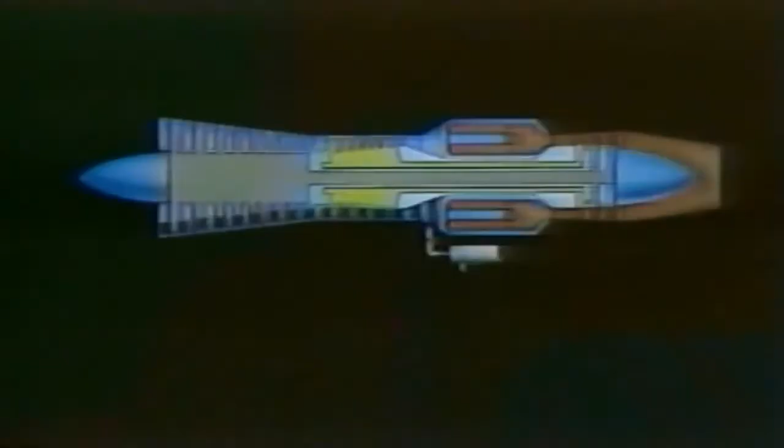But not all accessories are driven mechanically by a gearbox. Some accessories can be driven by compressed air from the compressor or diffuser section of the engine. For example, one of our engines has an afterburner fuel pump that incorporates a small air turbine, which works on the same principle as the gas turbine in the engine itself. Compressed air from the diffuser section flows through the air turbine, and that causes the pump to rotate.

On other engines, air pressure is used as the muscle power for controlling the opening of the variable area exhaust nozzle. Compressor air is also used to drive accessories on the airplane. You may hear of a customer air bleed, for example, to power an air conditioning system. However, we can't overdo this business of robbing compressor air for such purposes. We have to limit it to a small percentage of the engine airflow.

Okay, now that we have found ways of powering the accessories we need, let's look very briefly at 7 major engine systems. First of all, the lubrication system. And what do we have to lubricate? The engine bearings, the bearings and gears for the tower shaft, and the gears within the gearbox.

The oil used in jet engines is not your usual 10W30 type you might put in your car. It takes a special synthetic oil to withstand the extremes from the coldest spots around the globe when the engines are shut down, to the high temperatures created when operating at max power.

When you walk up to an engine, the only obvious part of the lube system is the oil supply tank, usually a saddle-shaped affair to fit the contour of the engine. It's mounted alongside the compressor section, up forward where it's not too hot.

Those metal lines you see carry the oil from the tank into the guts of the engine, to those bearings and gears, and then back to the tank.

But during this continuous operation, several other components in the system get into the act. A pressure pump and pressure regulator ensure an adequate supply of oil at each lubrication point. Scavenge pumps, that's a good name for them, grab the oil from each of the lube points after it's done its job and send it back to the supply tank.

Oil coolers remove the heat from the oil. It gets mighty hot during that round trip, especially to the bearings back in the turbine area. Oil filters clean the oil, removing foreign particles. Add a special drain port so we can inspect samples of the oil for contamination periodically, and our system is complete.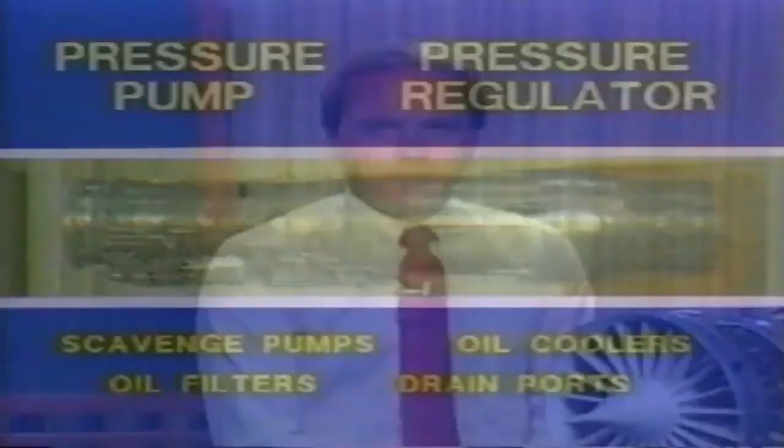Second, the fuel supply system. To start with, when you fill up your car, you pick regular or premium or maybe diesel. These are types of automotive fuels. When you hear of jet engines running on JP4, JP5, or JP7, these are different types of jet engine fuels, but they're not gasoline. Jet fuels are in the kerosene family.

The aircraft stores the jet fuel, most often, in wing tanks. It also has boost pumps and filters to provide a clean, steady supply of fuel to our engine. The engine fuel pump, driven by the gearbox, receives the fuel and delivers it under pressure to the gas generator fuel system. An afterburning engine will have a separate pump for the afterburner fuel supply, most likely the air-driven type we spoke of earlier.

Third, many of our engines require a hydraulic system much like the brake system on your car. When you apply your brakes, hydraulic fluid under pressure forces the piston to move in the actuating cylinder for each wheel brake. In a very similar way, we use hydraulic actuating cylinders to move things on the engine.

Remember those variable angle stator vanes? Hydraulic power can be used to set these at the right position. And the variable area exhaust nozzle? Some of our engines have hydraulic actuating cylinders to provide this movement.

Unusual thing about our hydraulic systems, though: we don't use the regular automotive or aircraft hydraulic fluid that you might be familiar with. Instead, the hydraulic pump, driven by that gearbox, picks up jet fuel right from the wing tanks, and the fuel becomes our hydraulic fluid. Being a circulating type of system, the fuel is cycled right back into the fuel system and is eventually burned in the engine.

The ignition system, number 4 in the list of systems we need. We spoke of the igniter plugs before. Always 2 plugs, a redundant system, in the burner section. The augmenter may have 1 or 2.

An electrical generator, driven by the gearbox, is the usual source of power. Ignition exciters take this low voltage supply and boost it to provide the high energy spark we need at the igniter plugs.

Fifth, we need a starter. We'll talk about how we start the engine shortly. The job of the starter is to get the high and low pressure rotors revolving up to a desired RPM. The starter is adapted to the gearbox, and its power is applied up through the tower shaft and from there to the high rotor. As it rotates and draws air through the engine, the flow of air causes the low rotor to rotate.

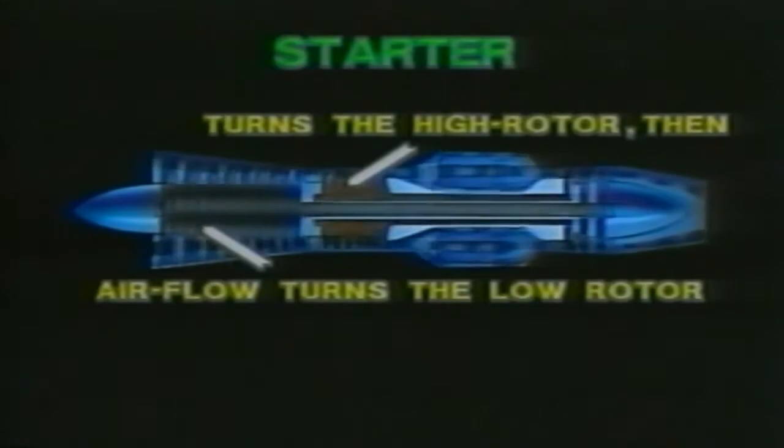There are a variety of power sources for jet engine starters. Some are electric, like your car. Most are pneumatic — air pressure, driving a small air turbine, is the motivating source.

Number 6, we need instrumentation. The pilot needs enough gauges to tell him that the engine is operating properly and safely — things like rotor RPM, fuel flow and pressure, oil pressure and temperature, and that all-important EGT, exhaust gas temperature, to make sure the turbine isn't exposed to excessive heat.

But additional instrumentation is needed for another purpose, as part of the scheme for controlling thrust. The heart of this system is the engine's fuel control. This is the seventh of our systems, and I saved it for now because it ties so many of the other systems together.

The system for controlling thrust, with the fuel control calling the signals, is a very complex system because of the very great demands we put on aircraft and their missions. You see, in today's jet aircraft, the pilot can pay only little attention to his engine. His attention must be outside the cockpit as much as possible. For that reason, they don't give him a lot of knobs to pull, levers to twist, or switches to flip.

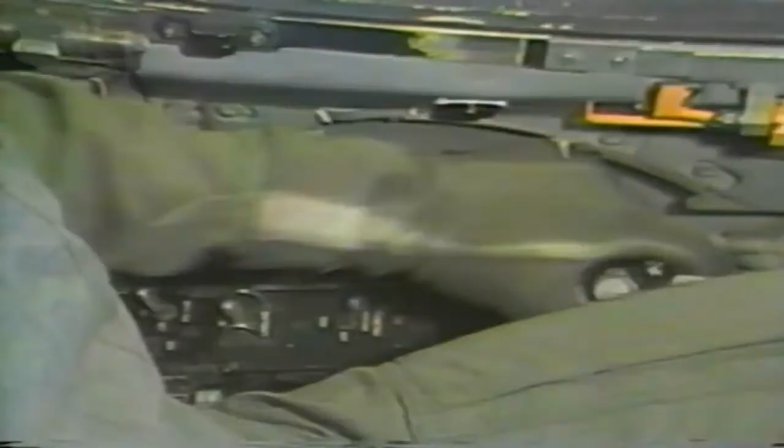Darn few. So the pilot's single main control over the engine operation is the power lever, or throttle. With this one lever, he commands the engine to provide the performance he calls for, and everything that happens in response to his request is automatic. And this is where the fuel control comes in. The pilot's power lever is linked directly, mechanically or electrically, to the fuel control.

Now, the fuel control is a brain of sorts. Besides knowing what the pilot is asking for, it senses everything that's going on, and that's where the additional instrumentation is needed. From instrument probes at strategic points, it senses the pulse of the engine, the critical temperatures and pressures, and things like RPM and fuel flow.

Moment by moment, it sorts all these things out and sets up the conditions by regulating other systems to give the pilot the thrust he has called for. On a typical afterburning engine, it schedules fuel flow to the burner section, fuel flow to the afterburner, variable area nozzle opening, the opening and closing of the compressor bleeds, and the position of the variable angle inlet and compressor stator vanes. The fuel control even schedules the igniters to fire when the pilot moves the power lever to start the engine. And when he pulls it all the way back for an engine shutdown, it shuts off the fuel. It's like having a genie at his command. All he has to do is ask.

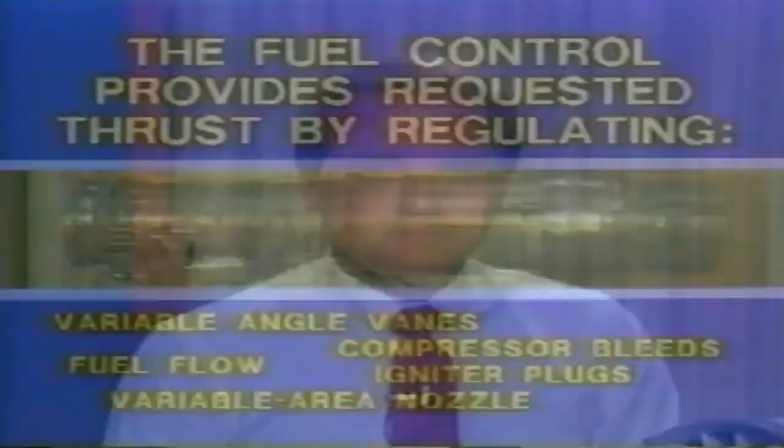Okay, we've got enough to run the engine now. We took the bare engine and added 7 necessary systems. We have the power lever to operate it with, and enough dials and gauges to keep track of its operation. One more point before we start it up, though. Take a look at the tachometer for engine RPM. There are some things that we ought to know here.

You can expect axial flow engines to operate in the ballpark of 8 to 14,000 RPM, somewhere in there. You may find a tachometer for the low compressor, the high compressor, or both. In either case, they operate at slightly different RPM, with the low compressor running slower than the high.

Take a closer look at the tach in the cockpit, and you'll find that it's not graduated in RPM, but in percent of full RPM. The jet aircraft industry agreed long ago they would go this route. This means that when the engine is running at the full RPM it was designed to run at, the gauge will read 100% RPM. With a readout like this, the pilot can speak in terms of an overspeed — the engine went to 103%, or the engine should idle at 52%.

On our test stands, however, you'll find tachometers of both types — those that read in RPM and others that read in percent RPM.

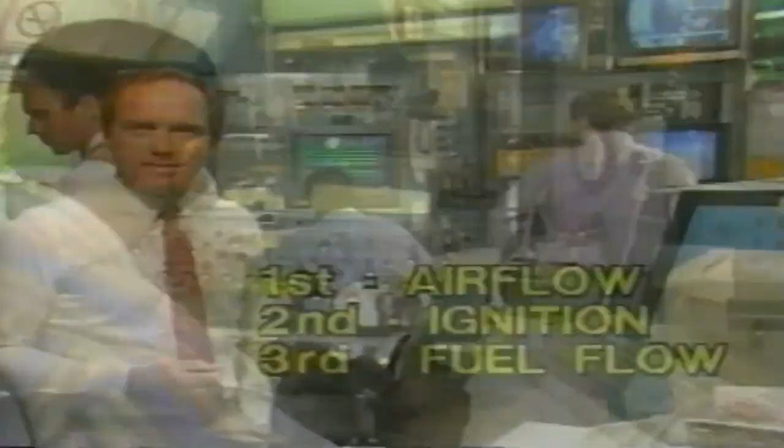But we're not done yet. The engine is running at a low RPM, but not to a point where it will sustain itself. So the starter continues to be applied, and the combination of the starter and the engine power bring the RPM up to its idle of about 60%. That's where the engine will sustain operation by itself. Then the starter is disengaged, and the starting cycle is completed. It's running now, and we can check it out.

Does it require warm-up time? No way. Piston engines require warm-up time, but not jet engines. Once that fire gets lit in the burner, it heats up in a hurry, like it or not. Oh, that's not to say that every bit and piece of the engine reaches its operating temperature in a split second. They won't. Your friends on the test stand will speak of stabilizing the engine.

To get accurate test data, they'll set the engine at the power setting they want and then leave it there for 3 or 4 minutes, maybe even more, so temperature effects will be complete. Then they check their data.

And you'd be amazed at the expansion that takes place when a stone-cold engine is cranked up and then pushed on up to full power. Any doubt in your mind as to where the greatest expansion takes place? Sure. Back in the burner and turbine areas, and of course, the afterburner, especially when it's lit.

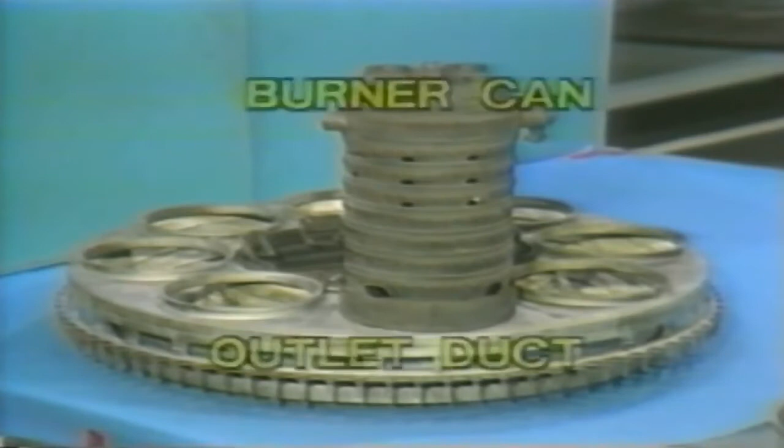Look at this burner can, for example. The front of it is firmly attached to the diffuser case, yet with flame temperatures of 3,500 degrees or more, it's going to expand like gangbusters. So it's designed so it can expand toward the rear. See how it mates with the outlet duct? How it can slide back and forth.

And check this Z-band support for the afterburner liner. You can imagine how hot this gets when the afterburner is operating. If these supporting members were radial, like the spokes on a wheel, they would buckle when the liner grows larger from the heat. Instead, these Z-band pieces can give a little without breaking.

While we have the engine running, let me show you what goes on inside the engine in terms of temperature and pressure. These are the numbers we might see if we ran our F100 engine, for example, at sea level on a standard day, quote unquote. I'll explain that one a little later on. First, let's look at internal pressures.

Air enters the inlet at 14.7 pounds per square inch, the air pressure that you and I live in. The fan section, functioning as the low compressor, compresses it to almost 45 pounds, and the high compressor brings it up to about 360. Pressure drops only a little going through the burner section, but drops way down as the turbine converts the energy of the gases into rotational power, and it continues to drop as it flows through the afterburner and out the nozzle.

Now, the temperatures. With air entering the inlet at 59 degrees Fahrenheit, it's a little over 1,000 degrees at the compressor exit, and that's just from compressing the air. The hottest spot in the gas generator, just behind the burner, or at the turbine inlet, the gases are over 2,500 degrees. We expect the temperature to drop as the gases pass through the turbine because the turbine extracts energy from the gases. Then temperatures zoom back up with the augmenter operating to over 3,200 degrees.

Is it any wonder we're continually searching for the best in metals? Consider the exterior parts, the components, the wiring, the plumbing. This will give you an idea of what the trend of temperatures is on the outside of the engine. Cooler, sure, but now you know where the hottest places are and why they mount these exterior parts up around the compressor and diffuser sections, where it's not so darned hot.

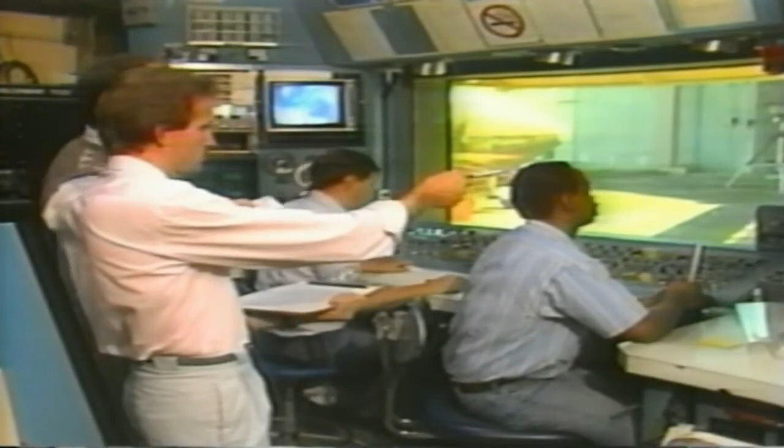Let's get back to that business of testing our engines on a standard day. Remember, we said the amount of thrust developed by a jet engine depends to a great extent on the amount of air the engine is handling, the mass of air flowing through the engine. It makes sense then that as the weather changes, the density of the air changes. Changes in barometric pressure and temperature change the amount of mass going through the engine, and therefore change the amount of thrust produced. With a low temperature or a high barometer reading, the engine will produce more thrust, and vice versa. The jet engine industry established 59 degrees Fahrenheit and 14.7 pounds per square inch as a theoretical standard day for engine testing.

But we can't sit around waiting for that standard day to happen. So our test engineers run the engines on any kind of day, and then mathematically correct the engine data to what it would be if run on a standard day. Now we can calibrate our engines in Nome, Alaska, West Palm Beach, Florida, or Timbuktu.

Calibration? That's when we run the engine to see if it performs to specified standards.

The environment has other effects on a jet engine too. A jet engine is like a giant vacuum cleaner, and it will suck in anything it can, dust and dirt. If it builds up enough on the blades and vanes, it can hurt engine performance. With the aircraft running on the ground, rocks and debris on the runway get sucked in. If you leave a wrench laying in an aircraft inlet, in it goes. FOD, they call it, foreign object damage. The heavier objects can damage the engine, and jet engine people have an eternal vigil to make sure that does not happen. On our test stands, we install an inlet screen, called a FOD screen, to prevent such damage.

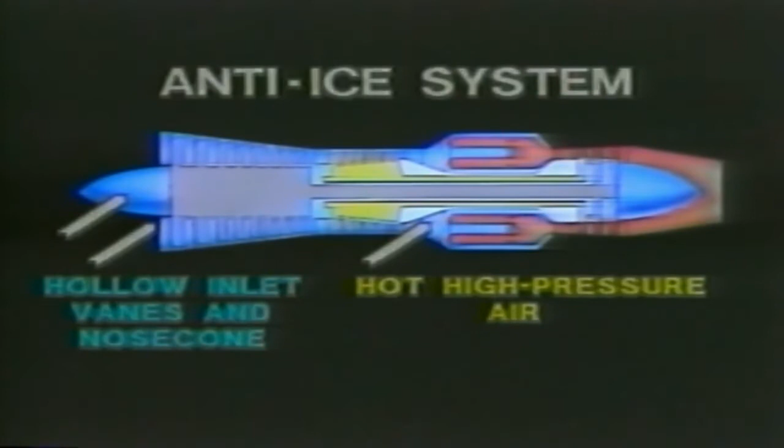The system ingredients are simple. We have a plentiful supply of hot, high-pressure air at the compressor exit in the diffuser case, and the nose cone and inlet guide vanes are hollow. Does that make the lights flash and the bells ring? Add a few feet of tubing and a control valve and one more essential part: an ice detection probe in the aircraft inlet senses the first formation of ice and opens the control valve.

Hot air from the diffuser flows through the valve to the inlet section where it passes through and warms up the nose cone and inlet guide vanes. From there, it flows into the main stream of compressor air. Now, ice can't form on these heated parts of the inlet. When icing conditions cease to exist, the detector probe closes the control valve, and our icing problem is solved.

They've just finished making some of their preliminary checks on the stand, so let's watch while they put the engine through its paces. The engine is at idle, that's about 60% RPM. Now the stand operator accelerates the engine on up to intermediate.

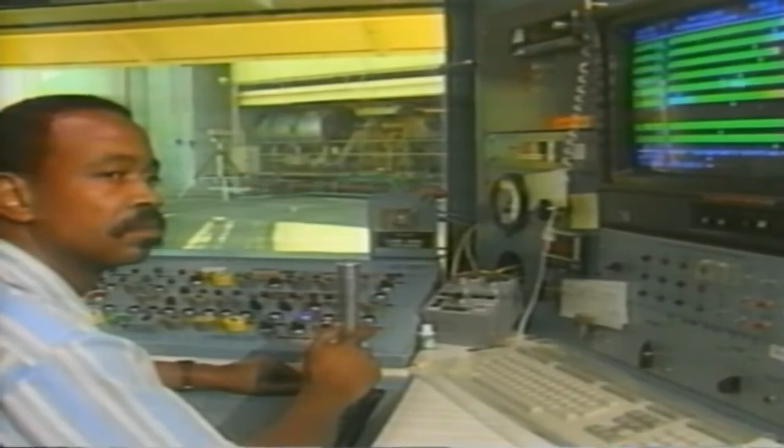That's full power from the gas generator with the augmenter off. That puts it at about 13,000 RPM and over 14,000 pounds of thrust. Of course, that's uncorrected data, and the engine is trimming itself. Trimming is the fine-tuning adjustments automatically made by the engine.

Now, back to idle, where trimming adjustments occur if required.

That brings up another term you'll hear, cycle. We just observed one type of cycle, idle to max and back to idle. Another type might be intermediate to max and back to intermediate again. We judge the durability of our engines and their components not only in terms of how many hours they will operate, but also in terms of how many cycles they will endure. When military pilots start putting their fighter aircraft through the hoops, these cycles really begin to add up, and this affects the lifespan of the engine.

Looks like they're shutting down, so let's talk for a while about engine performance. Not the nitty-gritty numbers the test engineers deal with, but a broader picture: 4 yardsticks by which our engines are measured. Sure, there are many more, but these are the ones you often read about and hear about.

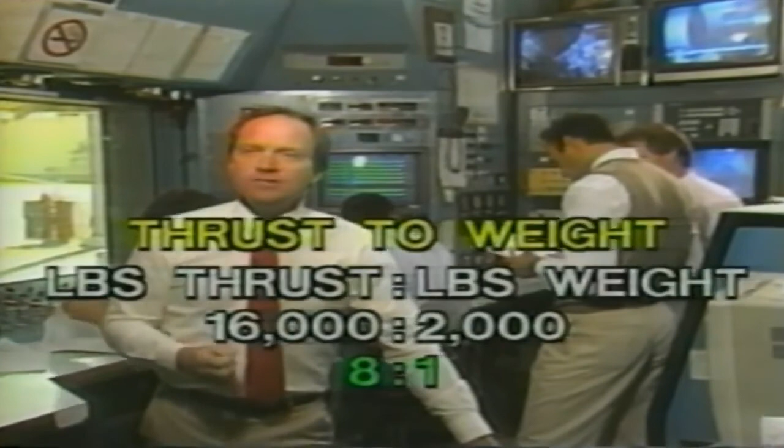Then there's the thrust-to-weight ratio. How much thrust does it produce compared to its weight? It doesn't do much for our image if we build a fine engine, but it weighs 16 tons. If I build an engine that puts out 15,000 pounds of thrust and it weighs 3,000 pounds, that's a ratio of 5 to 1. Let's try harder and build one that develops 16,000 pounds of thrust and weighs only 2,000 pounds, 8 to 1. That's much better. Now we're becoming more competitive. And it's a continual battle to make that ratio better and better.

Your engine having a TSFC of 0.4 is better than mine, which has a TSFC of 0.6. These examples, by the way, are typical of some of our commercial engines. Military engines, because of their missions, run a little higher. And when the augmenter is turned on, the fuel consumption doubles or even triples.

The fourth one, time between overhaul, or TBO. This one's simple: how many hours can you operate the engine before you have to remove it from service and totally overhaul it? Our commercial engines go 10, 15, and some 20,000 hours before overhaul. With a commercial jetliner flying at 500 miles an hour, in 20,000 hours it will fly 10 million miles. Why, that's, let's see, 400 laps around the world.